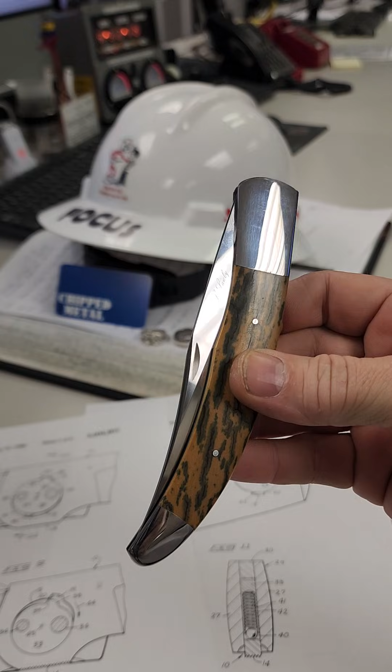So I mentioned the Sawby self-lock when I was talking about that Neeley lock on the Timberline a few days back. It's been about a year since I had this one out, so figured it'd be a good time to pull it and check it out.

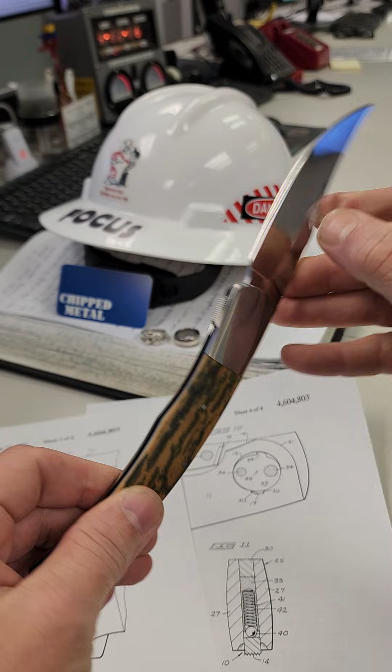Oh, I love this thing. I am a sucker for a toothpick pattern, and this extra large toothpick pattern is such a phenomenal piece. Just a real grail piece.

Scott did quite a few of the normal size toothpicks, which were about yay big, just under a 4-inch blade. From what I've heard, he only did maybe a dozen of these really big ones. Super slim design, insanely tight tolerances on the lockup.

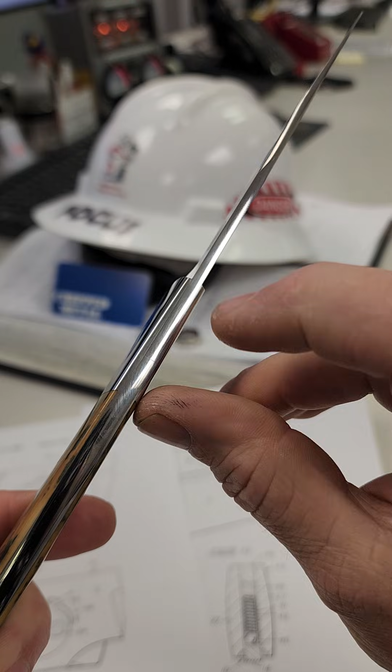You can just barely make out the seam, and it uses his self-lock mechanism, which the blade is the only moving part. You just push up slightly to disengage the lock and then start it closed, and then it drops closed with a really nice detent.

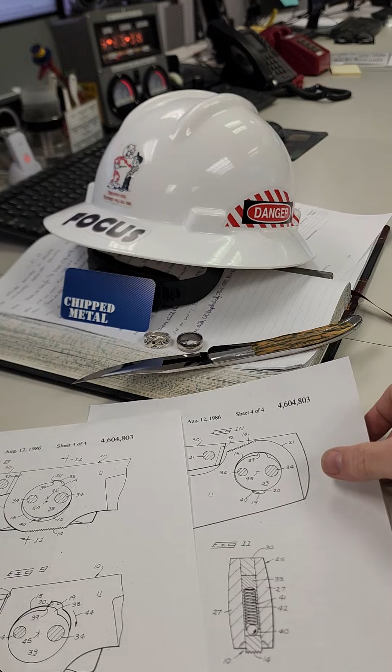Yeah, awesome piece. I picked this up on Blade Forums a few years back. Really stoked to have it. I actually printed out the patent drawings finally, so I can show you guys exactly what's going on.

Like I said, you shift the blade up, which disengages it from that locking lug and this huge oversized pivot. This ball bearing has a little spring that runs through the pivot and gives you that pressure to keep the blade in the locked position.

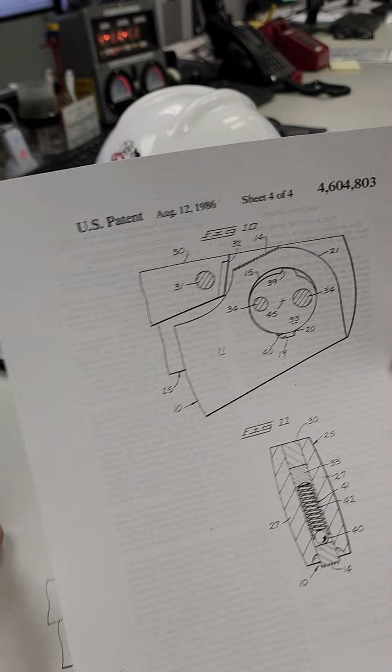And then you shift it up and start to rotate it closed. Once it gets into the closed position, that ball bearing actually drops into the locking notch in the blade, and that's what gives you your detent. You can see there's the cross section of that ball bearing. It makes for a very smooth mechanism when it's done right.

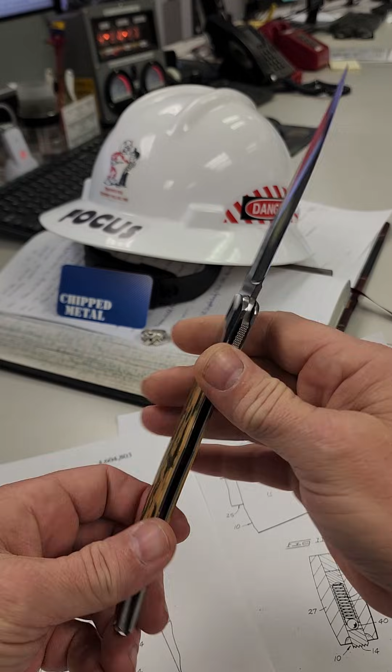This has never been successfully implemented in a production knife. Buck tried to use the mechanism on their 531 model, and it didn't go great. The examples that I've handled work, they function, they lock up, but they're not anywhere near as smooth as a custom by Scott.

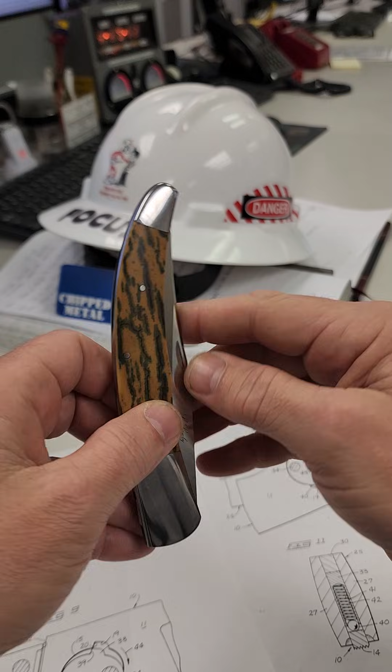The one I had felt a little gritty and almost squeaky when you opened it. You could feel the spring compressing, and there was like a little springy... I don't know, it was super hard to describe, but it was not this glass-like smooth action that you have with this one.

I had a smaller one that has carbon fiber handles that was just insanely Swiss watch smooth. This bigger one is a little heavier sprung on the lock mechanism, so while it's just as smooth, that one you could pinch the blade, get it past the detent, and it would just slowly drop open and lock up.

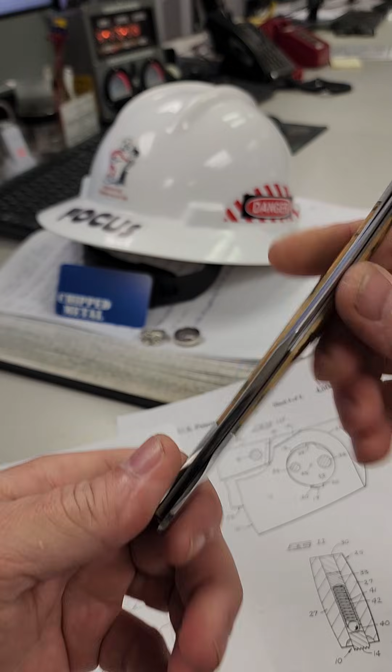Just, I missed that knife. I sold it to a buddy of mine who begged me to sell it to him for quite a few years after I picked up this big one, which was more my style, but damn, I still miss that knife.

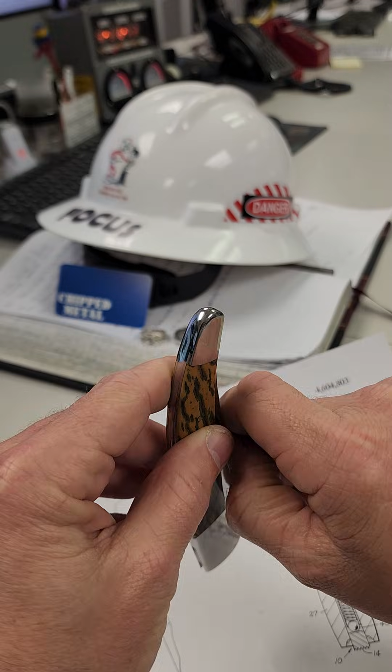So yeah, that's a look at a Scott Sawby self-lock. He did this lock in quite a few different patterns, traditional patterns kind of like this. He did his combat utility knife with the self-lock, which was a beefy, chunky utility knife pattern. There's quite a few of them out there, a pattern for any appetite, from utility to traditional, fancy to pretty utilitarian.

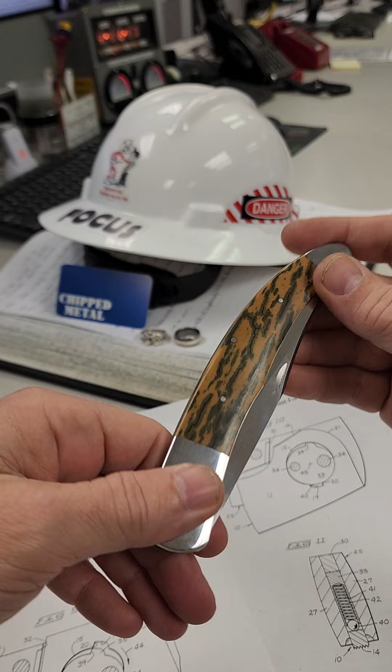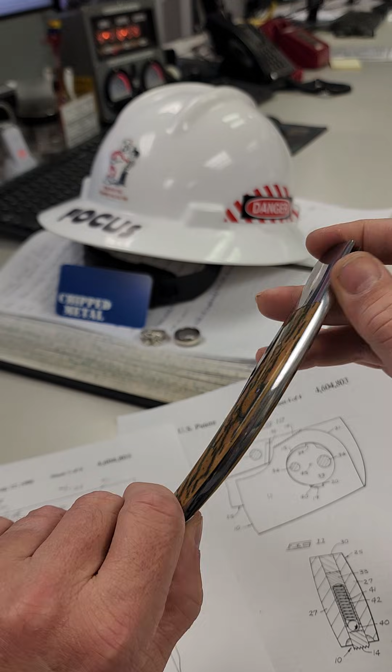They're not cheap. Probably the cheapest you're going to pick up one of his self-lock models is maybe $1,000 nowadays, in a relatively basic handle material. A rare large model like this with mammoth scales, this is probably a $2,500 knife nowadays.

But you know, as usual in my collection, it's not for sale. This is one of my babies. You can't have it.

But yeah, there's a lot of Scott's work out there. He was a pretty prolific maker, and his self-lock was also licensed to a couple makers to use. The only one that comes to mind off the top of my head is Bailey Bradshaw, I believe, also did some self-lock mechanisms. I had one of those that was incredibly smooth. I kind of missed that one too. I should hit up my buddy and see if he wants to sell it back to me.

Anyways, so yeah, there you go. That is a look at Scott Sawby's self-lock, and specifically this awesome extra large toothpick that I have in the collection. So there you go.